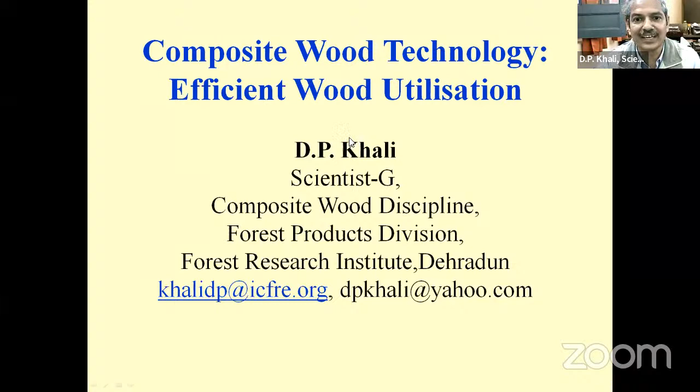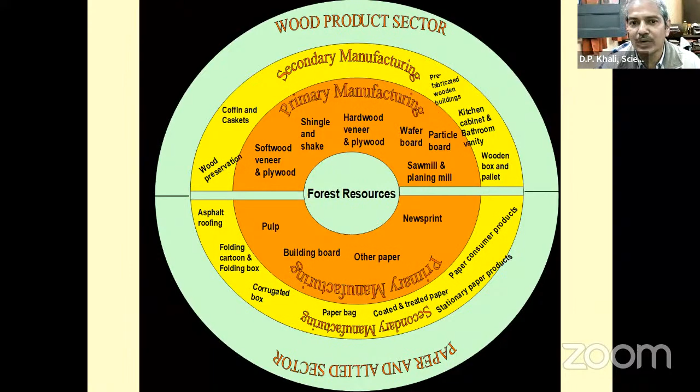I will be discussing with you all today on the topic that is composite wood technology, efficient wood utilization. So directly coming to the topic, basically the wood product sector can be broadly categorized into 2 categories. One we call the primary manufacturing sector, another we call the secondary manufacturing sector.

This slide is a very popular slide. You all must have seen it earlier also. So basically, you all know wood is a wonderful material. The advantages of wood, the merits of wood, you all know. But here I will be talking about the three major disadvantages of wood as far as utilization is concerned.

The number one disadvantage as far as utilization is concerned: wood has got a lot of variability. In other terms, we call wood an anisotropic material. An anisotropic material means its property changes with direction. You must have seen that its property from pith to periphery, even from bottom to top, varies. So this nature we call the anisotropic nature. As far as utilization is concerned, this is one disadvantage.

Another disadvantage: wood is not a dimensionally stable material. What does it mean? When wood comes in contact with moisture, it swells, and if you remove the moisture, it shrinks. So it changes its dimension when it comes in contact with moisture. So that is the second disadvantage.

The third disadvantage is that when we are using wood in solid form, a lot of wastage is there. That is the utilization yield. If we use wood in solid form or in the form of timber, the maximum utilization yield is up to 35 to 40%. The remainder is wasted or used for some other inferior purpose.

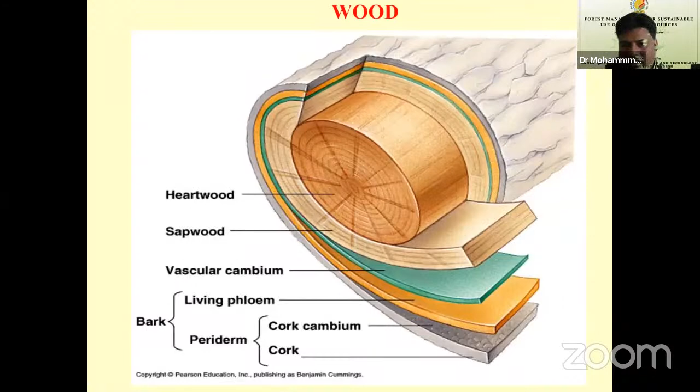Sir, I would interrupt you. Just a minute, sir. I think your slide is not moving. Okay. Yeah, it is moving now. Yes, I had not moved it.

Okay. So for addressing those three major disadvantages, we can use lignocellulosic material in the form of composite. Now, somebody asked, what is the technical definition of composite? When two or more dissimilar materials are mixed together and a new material forms, that material we call a composite. So a wood composite is made by mixing lignocellulosic material with resin and some additives for modifying certain properties of the end product. When these three things are mixed together, that process we call resination, and they are reconstituted in the form of a product. That product is known as a wood composite.

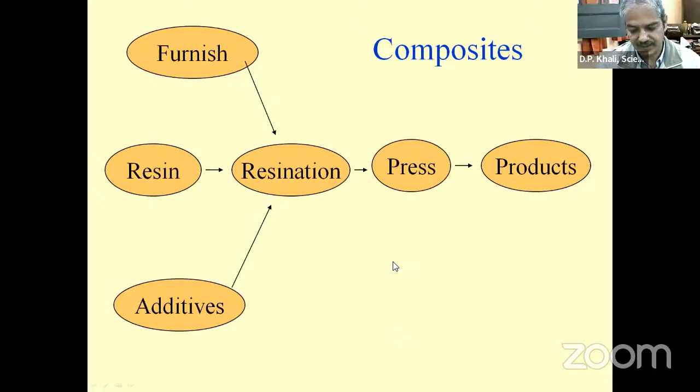Okay, so if we see the history, the usage of wood composites goes back to early mankind. But composites can be categorized into three major types. The first one is where we make composites using veneer. Veneers are nothing but very thin sheets of wood. If the constituent material is in the form of veneer or lamella and you make composites out of that, that is the first type of composite.

In the second type of composite, the constituent material is in the form of particles; an example is particle board. In the third, the constituent material is in the form of fiber, and if we make composites out of those fibers, that is the third category. So these are the major categories of composites: plywood, particle board, and fiber board.

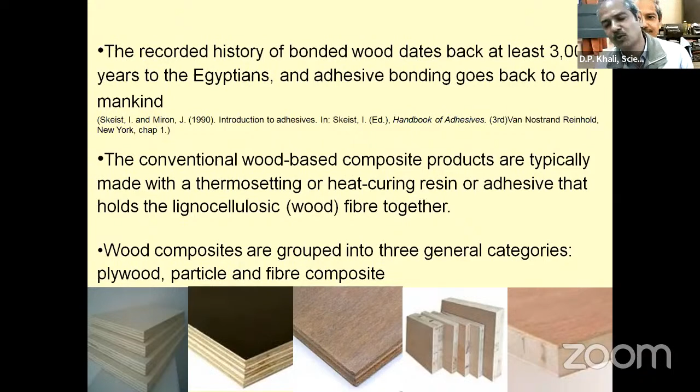If we see the market share of these composites, globally the market is still dominated by particle board. As far as our country, India, is concerned, the market is still dominated by plywood. 75 to 80% of whatever composites are used is plywood. Particle board has only a 10 to 15% market share, and MDF only 5 to 10%. What is the reason? In the coming slides, I will be discussing it with you.

Still, in our country, the major wood consumer in India is the plywood industry. As you all know, before the green felling ban started, the plywood industry was mostly dependent on forest trees only. So whatever commercially available trees were available could be utilized for manufacturing of the plywood.

Earlier, mainly Acacia species, Abies pindrow, Albizia lebbeck and even Dipterocarpus species were used, because Dipterocarpus species were available in plenty at that time. Those were converted to veneer, and the veneer was used for manufacturing of the plywood. But after the ban on green felling, no wood species are available from the forest, so the plywood industry is only dependent on plantation wood species.

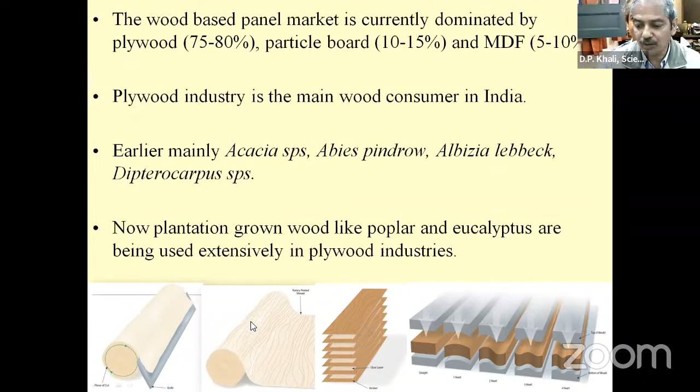As far as northern India is concerned, the plantation species mostly available are poplar and eucalyptus. So nowadays the plywood industry is using poplar and eucalyptus for manufacturing of the plywood. And in southern India, rubber wood is also available, so rubber wood is also being used for manufacturing of the plywood.

But not only these three species; whatever other wood material is available can also be utilized for manufacturing of the plywood. But mostly these three species are available and used by the plywood industry.

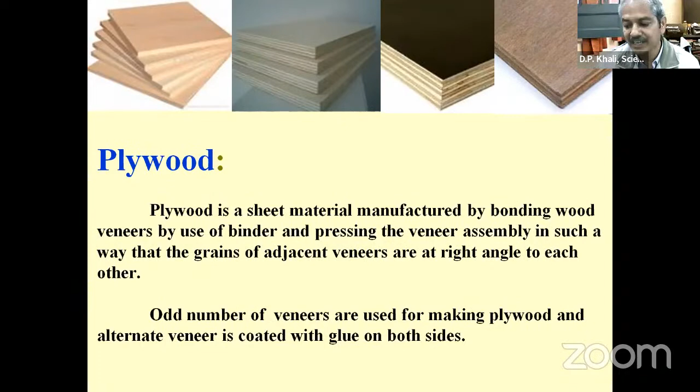Now, as far as the definition of plywood is concerned, there are three important points. Number one, plywood is made of veneer. Veneers are nothing but very thin sheets of wood material. Second, two adjacent veneers are always perpendicular to each other. And third, for balanced construction, an odd number of veneers is always used for manufacturing of the plywood.

Okay, now types of plywood. For aesthetic purpose, if on the top and bottom we use some decorative veneer, we call it decorative plywood, and the second type is commercial plywood. About 75 to 80% of production in our country is general purpose plywood. In the bracket, I have written the IS specification. General purpose plywood IS specification is 303, and all these specifications are freely available on the net. Anybody interested to know more about individual plywood can download them through the internet.

General purpose plywood can be categorized into two categories depending on where it is used. If it is used for interior purpose, it is interior grade plywood, and if it is used for exterior purpose, we call it exterior grade plywood. Interior or exterior grade depends on what kind of adhesive we are using. That also I will be discussing in brief later on.

Then another type, shuttering purpose plywood, is manufactured for certain purposes. Structural plywood, although the IS specification is there, no industry in our country is manufacturing it because there is no demand at all right now. But still, it is for academic interest and the IS specification is there.

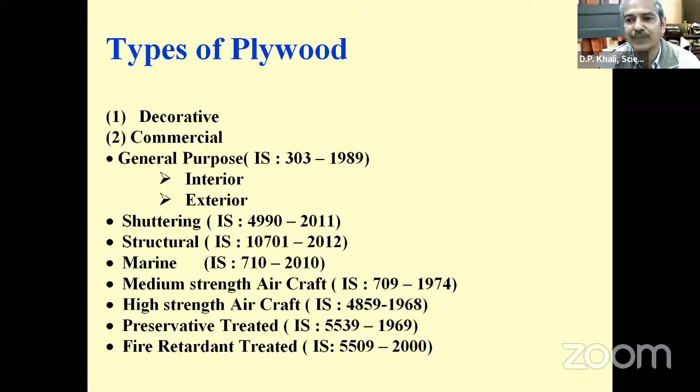Marine grade plywood can be utilized for extreme conditions, like dockyard usage or marine conditions. The next two are again for academic purpose only: preservative treated plywood and fire retardant treated plywood. These are also available and are being manufactured in our country.

Now, why is the market share of plywood still dominant? There are plenty of reasons. The first reason is plywood is a highly stable panel, and the earliest composite developed in our country is plywood, so most users are familiar with it. There is a lot of awareness of the usage of plywood, so that's why this market is still dominated by plywood.

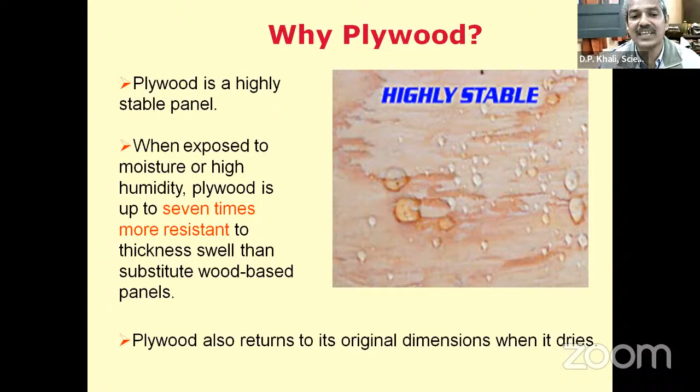The second important aspect is dimensional stability. Particle board and fiber board, if not used properly, are not dimensionally stable because moisture penetrates through their edges, and then they swell. Plywood is approximately 7 times more resistant to thickness swell than the substitute wood-based panels. And if plywood has absorbed some moisture, once it dries up, it regains its original shape and size.

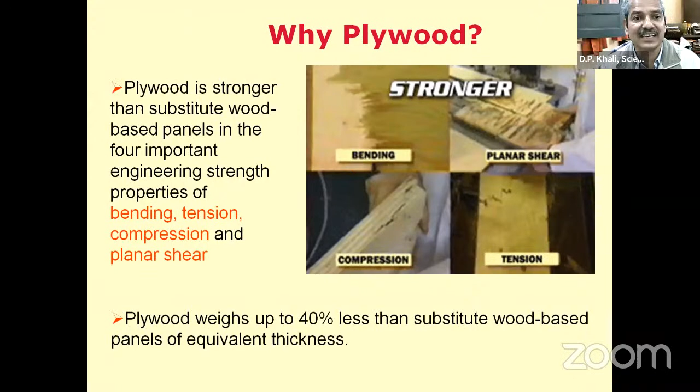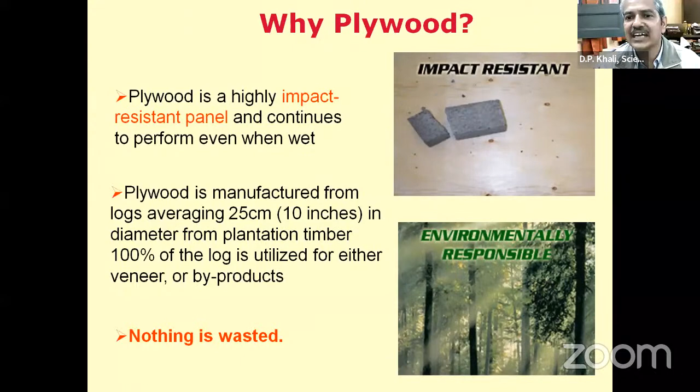Second important aspect, that is the strength aspect. So all four strength aspects, that is bending strength, tension strength, compression strength, and planar shear, it is stronger than other substitute wood-based panels. So this is another important aspect. The third important aspect, highly impact resistant. Plywood is highly impact resistant. So due to these reasons, still the market is dominated by plywood, the usage of plywood.

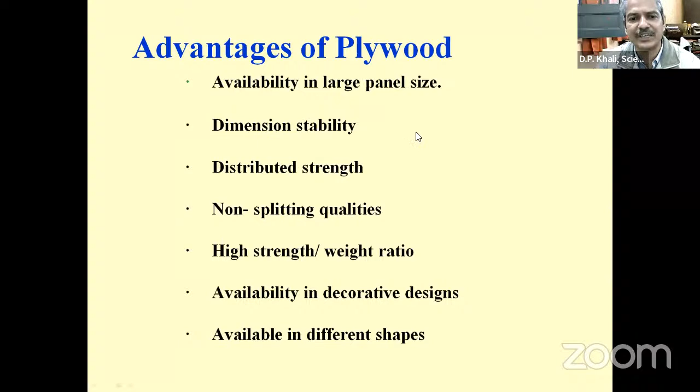These are some of the advantages you all must be knowing, because plywood, whatever size you require, in the market it is available in various sizes, starting from 3 feet by 6 feet, even up to 12 by 24 feet size plywood are available. Even if demands are there, bigger than the size of 12 by 24 can be manufactured. Dimensionally stable, distributed strength, non-splitting quality, high strength to weight ratio. So in different shapes and sizes you can manufacture plywood.

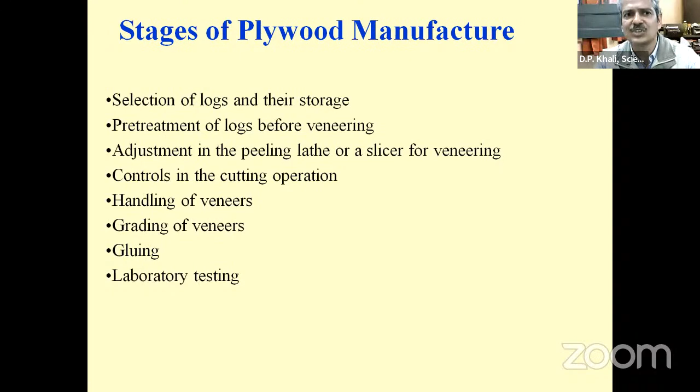These are the stages of plywood. In brief, I will be discussing with you the stages of plywood. The first one is the important one, selection of logs and their storage. This is when the plywood industry was dependent on the forest wood. At that time, plenty of raw material was available, so we had the choice of selection of the material. But nowadays, we don't have any choice. Whatever plantation timber is available has to be converted to veneer and to plywood.

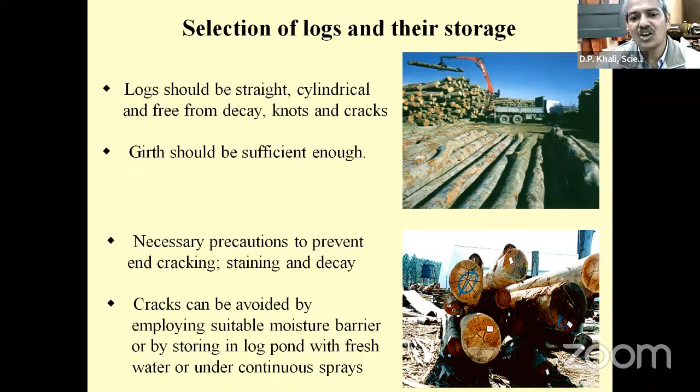And after felling of the log, one has to try to avoid moisture loss. If more moisture loss is there, then again we have to reintroduce the moisture inside the log. That's why during storage, it has to be stored in the log pond. If at all it has dried, then steaming is required. The log has to be steamed. Now, how long it has to be steamed, the duration, all these depend on what kind of wood is there, how much specific gravity it has got.

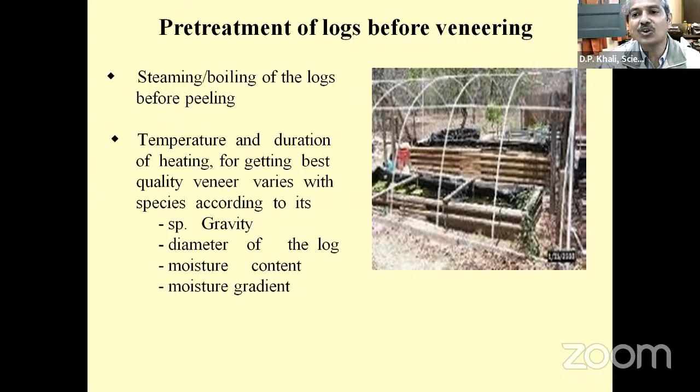If it's a very hardwood species, then a longer duration of steaming is required. If a larger diameter is there, again, it depends on that also. How much moisture content it has already got, and the moisture gradient. So the temperature and duration of heating depend on these four aspects. Okay.

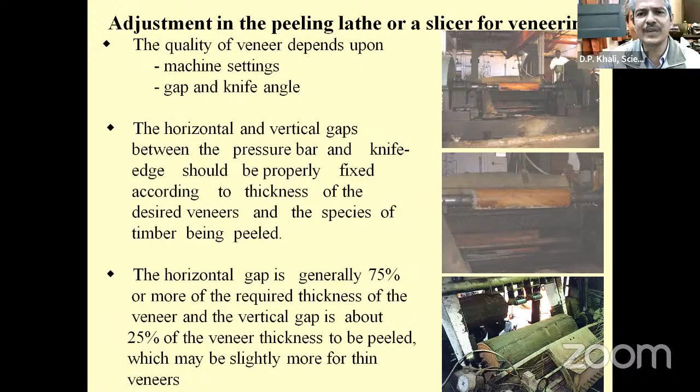Now, the quality of veneer depends on the setting of the machine, the gap and knife angle, depending on different wood species. For hardwood species, a different knife angle and gap setting is required. Then, depending on the thickness, how thick a veneer we require. So all settings have to be done here at the time of peeling. This type of peeling we call rotary peeling. With the help of this rotary peeling, we are getting the veneer.

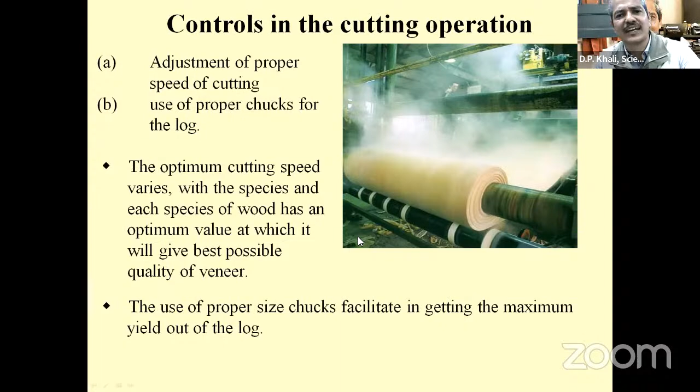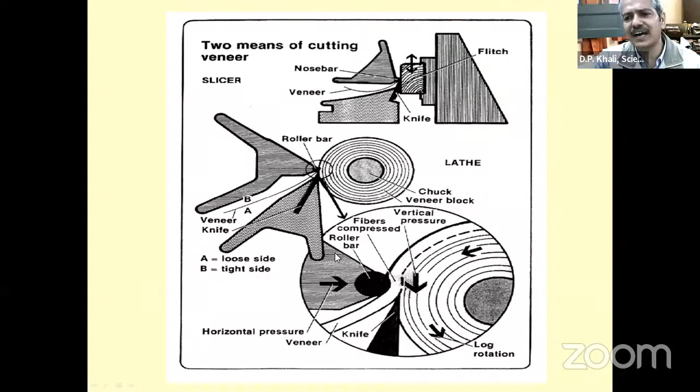So here, if we are trying to manufacture the decorative veneer, the log first has to be converted to the flitch, in the form of a flitch only. Then only we can get this decorative veneer. But in the rotary peeling lathe, the log first has to be debarked and directly it can be put in the peeling lathe and the veneer can be generated.

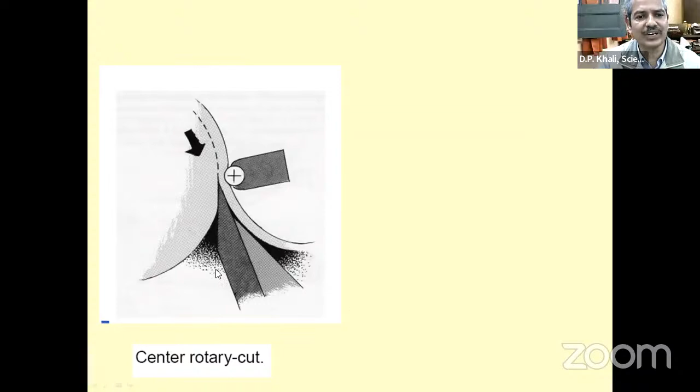This is another schematic view. You can see center rotary cut this way. The knife is coming in contact with the log and a continuous piece of veneer is coming out. And so these are the schematic diagrams I am showing you.

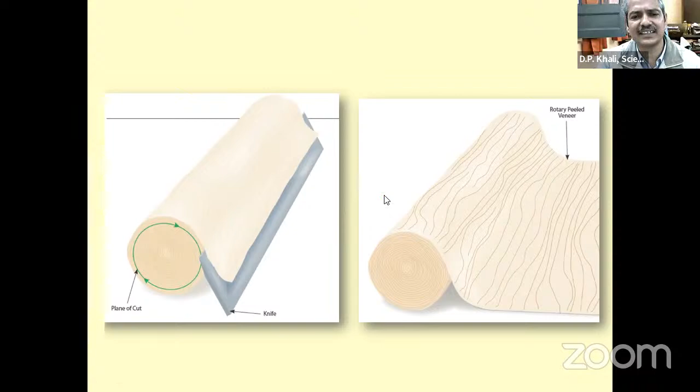Now, once veneer has been generated, there are two ways. If we have got a very good cylindrical log, then a continuous piece of veneer will come out. But ultimately we have to make the 6 feet ply. So we have to cut the veneer to that size. Converting a bigger size of veneer into a smaller size of veneer, that process we call the veneer clipping process.

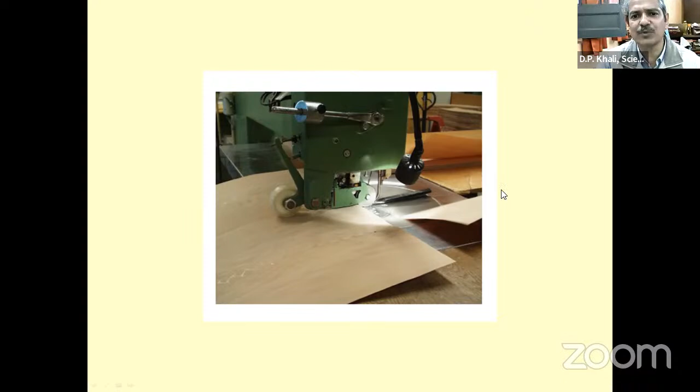Now, once veneer has been generated, then handling of veneer. Because earlier Dipterocarpus veneers were being used, Dipterocarpus species can be used as top and bottom veneer and also as core veneer. So immediately after peeling, those veneers can be categorized, whether some veneer can be used for the face, or the defective one can be used for the core.

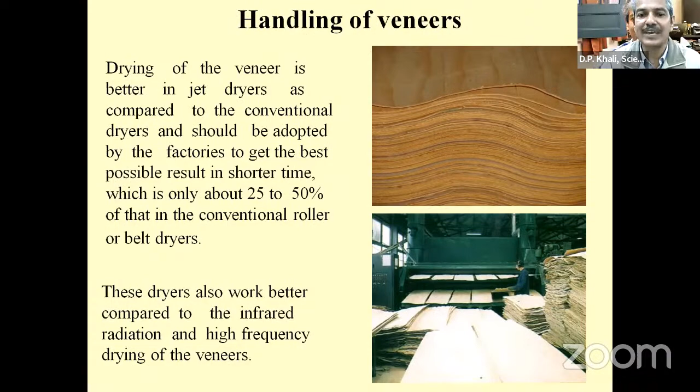But if you are using poplar and eucalyptus, then this classifying or grading is not required, because poplar and eucalyptus are being used for the core purpose only, not for the face and back. For face and back, still in our country, the Dipterocarpus species is being used. Nowadays some gurjan and other species veneers are being imported from abroad for face and back veneer. Nowadays we are working here at FRI on melia. We are trying to convert melia for face veneer and back veneer.

So once grading has been done, then applying the adhesive on the surface of the veneer, because ultimately those veneers have to be bonded together. So how to apply the adhesive on the surface of veneer? There are various ways, but in our country, the major method is application of the glue with the help of a glue spreader.

Again, you can see in the photograph, this is nothing but a sugar cane crushing kind of machine. At the bottom, the tank of the adhesive used to be here, because these two rollers are rotating anti-clockwise. So the bottom roller will dip in the adhesive and take the adhesive onto its surface, and in that process, on the upper roller also adhesive will get applied, and then the veneer can be passed through these two.

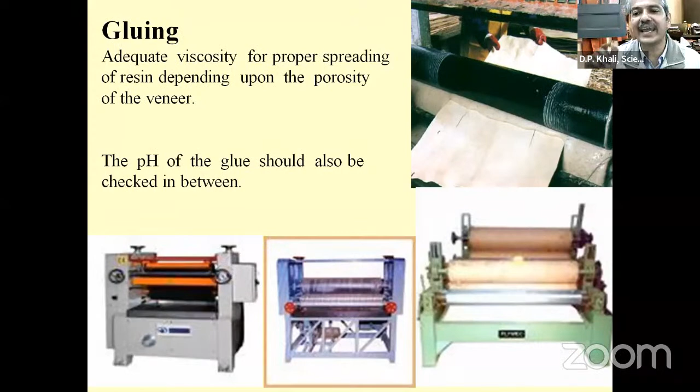Once veneer has been passed through these two rollers, the adhesive will get applied on the whole surface of the veneer. That is the easiest and cheapest way of applying the adhesive. Other ways like spraying, brushing, are also there. But at this step, the pH control becomes very important. That's why quality assurance in the industry matters here. Anybody can make composites, anybody can make plywood, but quality plywood can be made by a trained person only. So knowledge of all these parameters is required.

Assembly means we have to arrange the veneer in such a way that two adjacent veneers are always perpendicular to each other. The veneer which has adhesive on both surfaces, we call the even number veneer. Suppose we call the top number 1 veneer, that veneer will not have any adhesive at all. The second number veneer will have adhesive on both surfaces. The third veneer will not have any adhesive at all. So top and third will have the same direction, while the second number veneer will have the perpendicular direction. That's why always top and bottom - if we have 7 veneers, both surfaces will have the same direction. That's why it's called the balanced construction. This type of construction we call balanced construction.

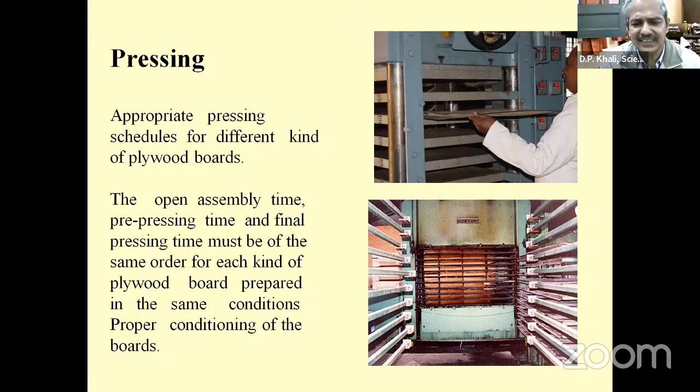So always for manufacturing of plywood, odd number of veneers are used. These are some technical terms, so I will not go into detail.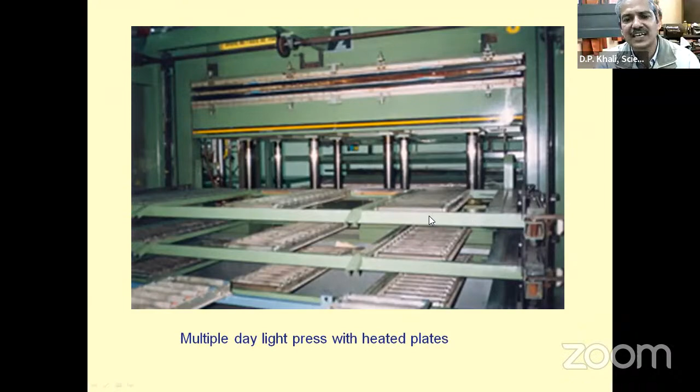This is a multiple daylight press, multi opening press, continuous press, industrial press. Industry uses this one. It's semi-automatic - here conveyor belts are there. Using conveyor belt loading, automatic loading and automatic unloading can be done.

Once plywood, because we are a research organization - or any composite for that matter - has been prepared, for quality assurance random sample selection is required. So sample has to be selected and those have to be tested. So laboratory testing is actually here.

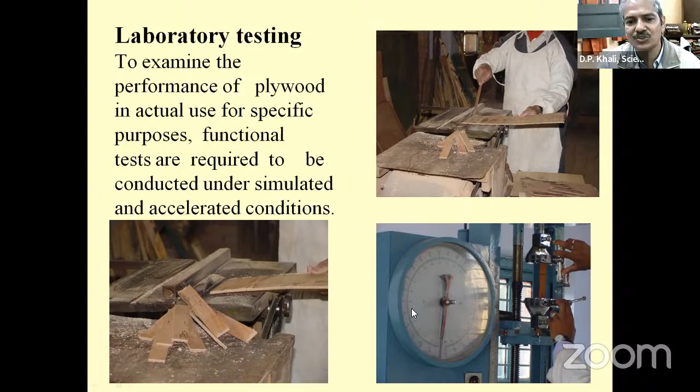This is a tensile testing machine. You can see here a very primitive type. We have computerized ones also, but for teaching purposes, because here we can show how much load is being applied, at what load, how much deflection is there. So all these things can be seen. For teaching purposes, this one is the best one.

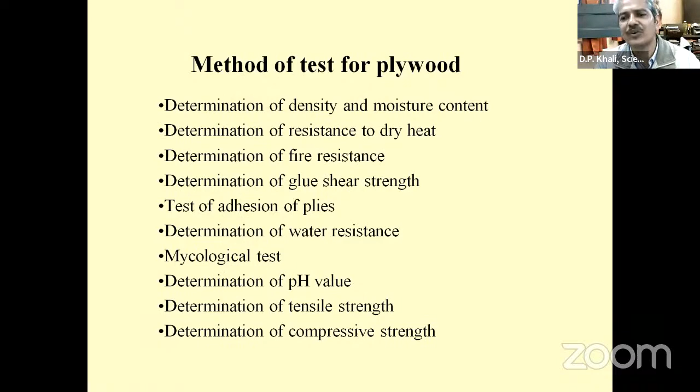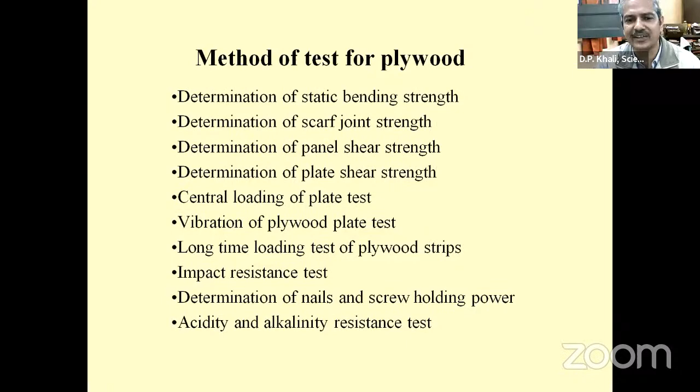Now what kind of test has to be performed? It depends on where our product is going to be used. Depending on end use, that particular test has to be performed. For insulation purposes, the plywood is being manufactured, so related to insulation. If it is being used for semi-structural purpose, then strength as well as durability. For furniture manufacturing, if it is being used, then screw holding, nail holding, all those kinds of tests. So depending on end usage, the test has to be performed.

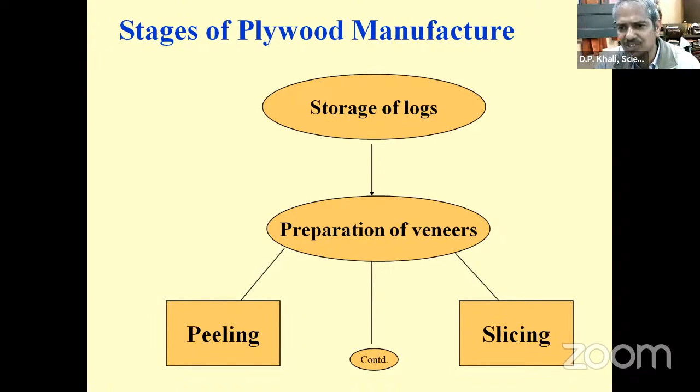Now this is the stages of plywood manufacture, in a flow chart: storage of log, preparation of veneer - two ways of preparation, peeling and slicing - then clipping or splicing. If bigger veneers are there, converting into smaller pieces is clipping; from smaller to bigger is splicing.

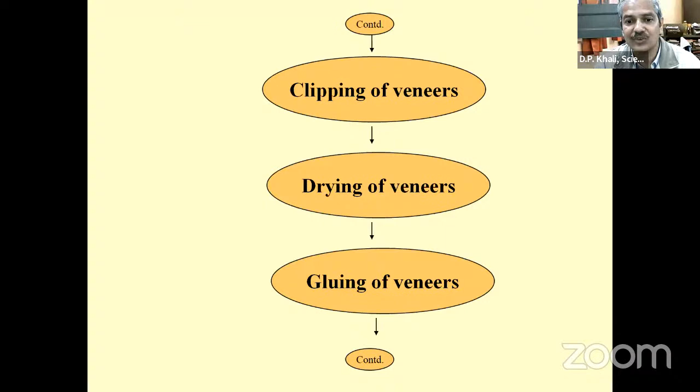The drying of veneers becomes very important because adhesive bonding can achieve the ideal good strength if moisture content is below 12%. Then gluing of veneer, assembly of glue veneer, pressing of assembly - now cold pressing and hot pressing. It depends on what kind of adhesive we are using. Now here cold pressing does not mean freezing temperature, it means room temperature pressing. So even if we are using urea formaldehyde adhesive, curing can take place at room temperature.

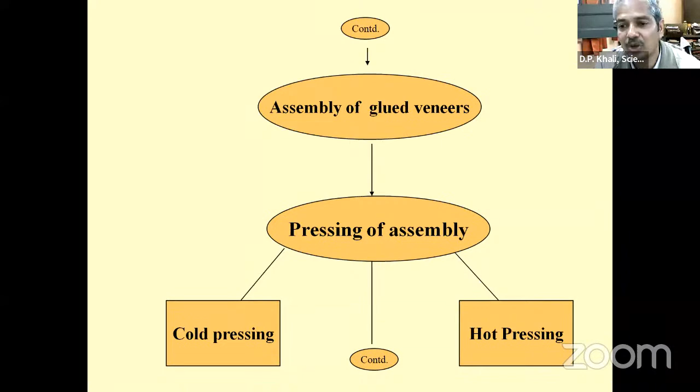Here curing means tacking of the adhesive - curing means bond formation. If we are establishing the bond, that process we call curing. So even if we are using urea formaldehyde adhesive, cold pressing can be done, but in the industry mostly hot pressing is the preferred one. Then conditioning, finishing, packaging, and marketing. So this is the manufacturing process of the plywood.

Same way we can manufacture other composite boards, only the preparation of raw material differs. In plywood, the log is converted into veneer, then veneers are used for manufacturing plywood. If we have to make particle board, first the lignocellulosic material has to be converted into particles, then the adhesive has to be applied on the surface of the particles, then those have to be reconstituted, using the same kind of press in the form of particles.

Similarly, in the case of fiber board, the lignocellulosic material has to be converted to fiber using various pulping processes. But for manufacturing medium density fiber board and hard board, we use the thermomechanical pulping process. There are other processes like chemical pulping here.

Lignocellulosic material can be converted into fiber using the chemical process, which is adopted in the paper industry. But as far as the fiber board industry is concerned, the preferred pulping process is thermomechanical pulping.

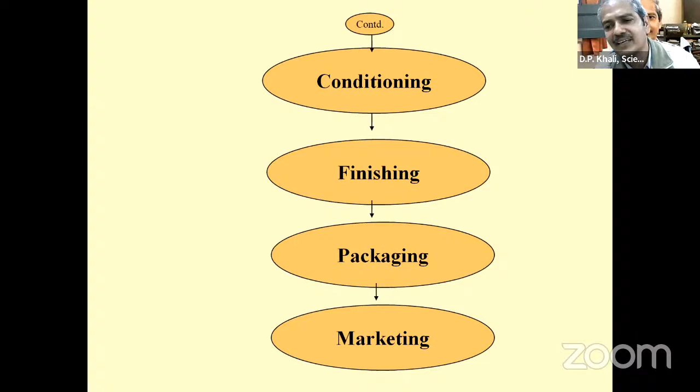Once the raw material is ready, adding the adhesive can be substituted in the final product. Now what is the adhesive? Again, for quality assurance and whatever desired quality we want, the quality depends on what kind of adhesive we use. Adhesive is nothing but the material which binds together the lignocellulosic material.

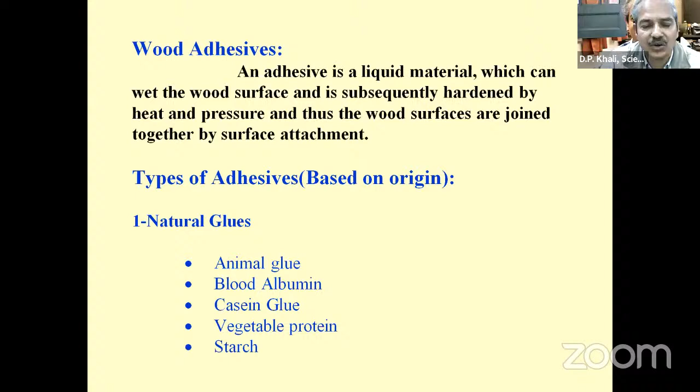It can be categorized into two categories depending on origin: natural glue and synthetic glue. Nowadays, nobody uses natural glue. Mostly synthetic resins are used as far as our country is concerned. But with synthetic glue, a lot of environmental concerns are there, so a lot of R&D is being carried out.

To see whether we can switch over from synthetic glue to other glue systems, Dr. Nasir has done some work on binderless systems also. Similarly, from nature, lignin-based glues and tannin-based glues are also available, and those can be utilized.

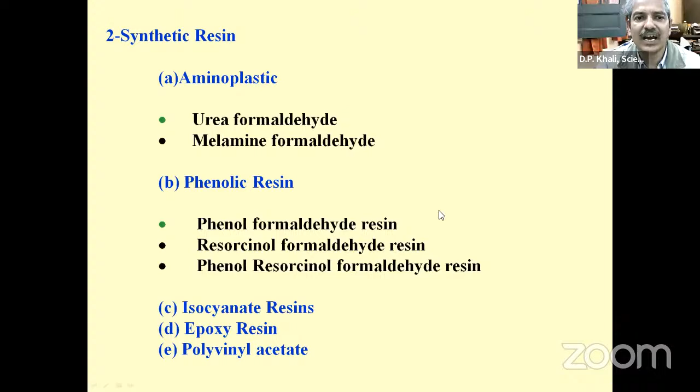But still, as far as our country is concerned, for interior purposes amino-based adhesives are being used, and for exterior purposes phenolic-based adhesives are used. Exterior-grade plywood is manufactured using phenolic formaldehyde adhesive, and interior-grade plywood uses aminoplastic, that is urea formaldehyde adhesive.

Grades of adhesive include interior grade and exterior grade. Now this last one is very important: boiling water proof, boiling water resistant, and moisture resistant. The adhesive can be categorized into three categories: BWP, BWR, and MR.

MR is the inferior one, used for interior purposes. With MR grade adhesive, plywood manufactured cannot be used for exterior grade at all, only interior grade. It can survive in dry conditions, but if moisture comes in contact, it may get disintegrated.

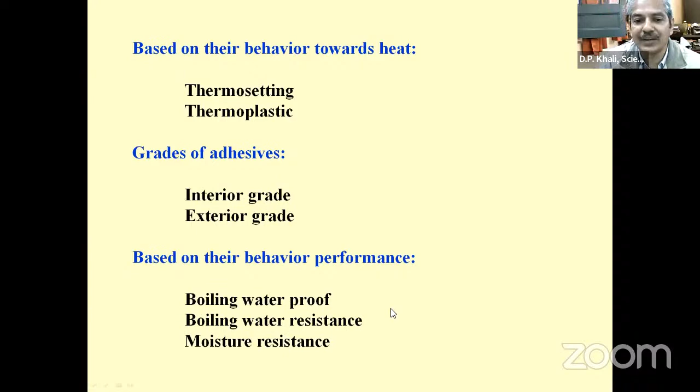Boiling water resistant adhesive can be used for exterior purposes. BWP, boiling water proof, can be used for extreme conditions like shuttering purpose plywood. This BWP adhesive is also used for marine grade plywood.

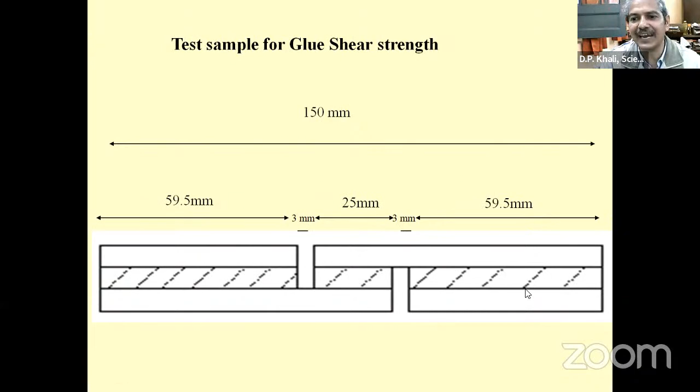Now, what does average and individual mean? Since wood is a biological material, to cater for variability, at least 6 samples are tested. The average of 6 samples should be more than 135. Out of those 6 samples, none should have less than 110 kg. So how much load should 1 square inch area be able to withstand? Only 1 square inch area should be able to withstand more than 135 kg.

And in the case of BWP, similarly in the case of BWR, and in the case of MR, because it is used for interior purposes, the average should be 100 kg, with individual samples at 80 kg.

Now, this is for the test of strength, how much strength it has got. Now, how to test durability? For durability, two tests have been simulated in the lab as accelerated tests. The first one is the wet test. What does the wet test mean?

For BWP, those kinds of samples, as shown in the next slide, are kept in boiling water for 72 hours. After boiling those samples for 72 hours, they are again subjected to the glue shear strength test. If they are able to withstand more than 100 kg, then we say it meets the BWP criteria.

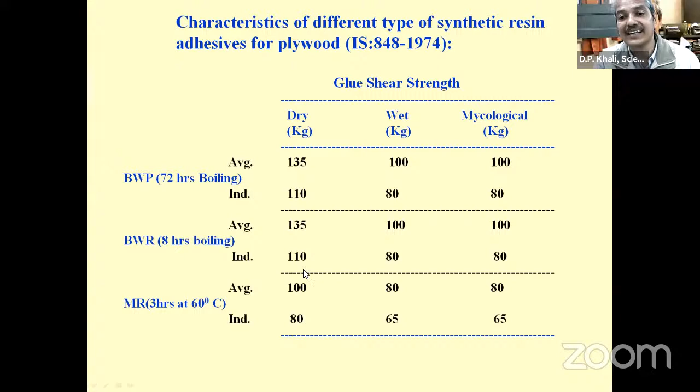So you can see that if any plywood is ISI marked, then it should have very good quality, even moisture resistant also. Moisture resistant also, it should withstand 3 hours warm water dipping test. Then only that ply can have the ISI. So for academic as well as for quality assurance, this is essential, which I have shown you.

Now this, we call the diagnostic slide. I can show you where the failure occurred, what kind of failure has happened, what went wrong during manufacturing. So for industry purpose and for quality assurance, it becomes very important.

The topmost, you can see, the green one is the adhesive layer, the yellow one is the veneer wood. If wood failure is taking place, this is a structural failure. This is due to process parameters. Somewhere we have done wrong with our process parameters, whether we have applied less pressure, or temperature is not sufficient, something related with process parameters.

So the second one here is non-compatibility. Wood-to-adhesive failure is here, that is, compatibility is not there; adhesive is not compatible with wood. The third failure, if we are able to see it, means wood failure has taken place. So either we have applied more amount of adhesive, or in the adhesive itself there's some problem.

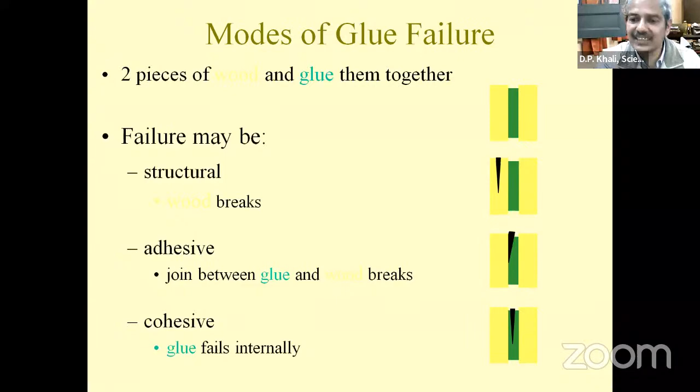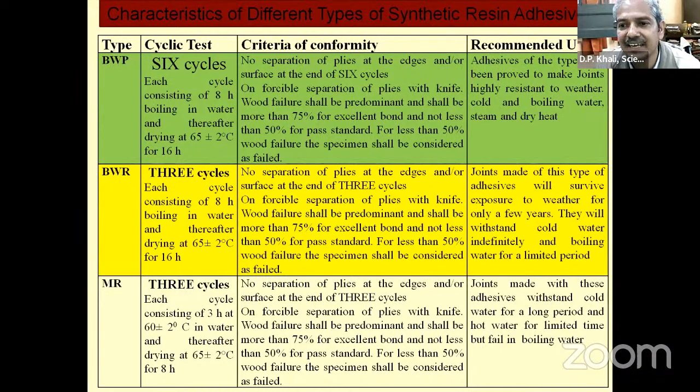And that's why we call it diagnostic. Now earlier I gave the testing method for lab purposes, but in industry they cannot have the UTM, universal testing machine, for their quality assurance. So this is for testing the quality assurance as far as industry is concerned, so they can do it easily in their industry.

Having a small kind of knife, the photograph I will be showing, what kind of knife we can use. So they can boil using any water bath or even a cooker also. They can boil it 6 cycles for BWP, cycles consisting of 8 hours boiling in water and thereafter drying at 65 degrees for 16 hours. Such type of 6 cycles they have to perform, and then see whether veneers are getting disintegrated or not.

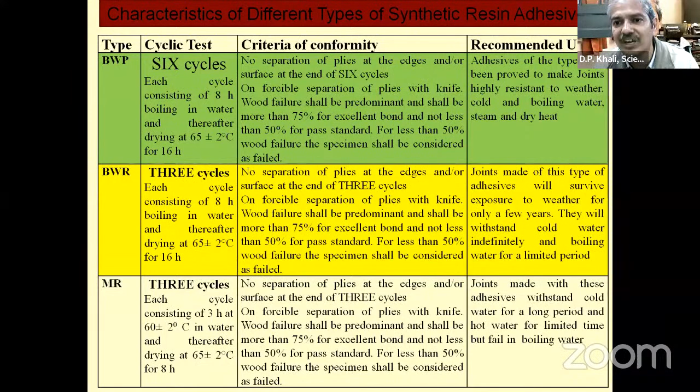And then forcefully inserting the knife in between 2 veneers, if they are not disintegrating, this criteria meets the BWP. Similarly, for BWR, 3 cycles has to be performed, and for MR, 3 cycles, but the conditions of the cycle are different. We are only dipping 3 hours in warm water and then drying for 8 hours. And if it meets the criteria, then we say that the proper adhesive is being used.

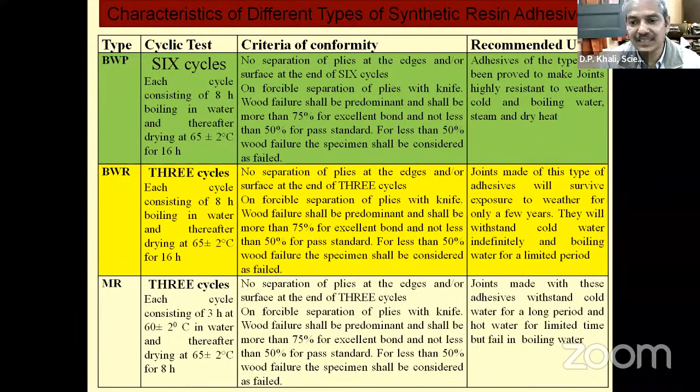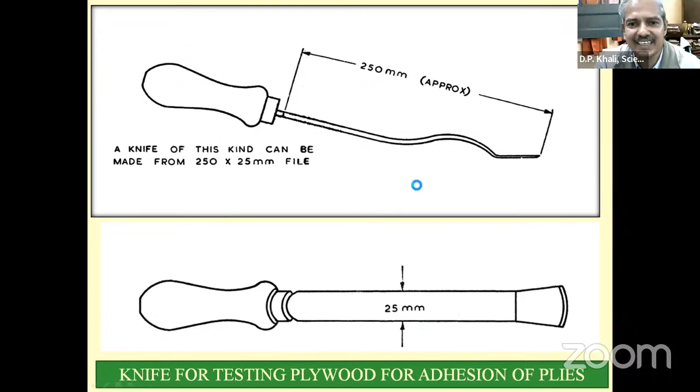So this is for the industrial purpose; all these details I have given. Now, what kind of knife? Hopefully, either one of the details that has been given in the IS specification, either kind of knife can be used for separating 2 adjacent veneers. Now, for general purpose, that much is required.

Adhesive becomes very important, but if you are making marine grade and concrete shuttering grade plywood, then treatment also becomes very important. Because ultimately here wood is also being used, and that plywood is going to be used in marine conditions where it is in contact with a number of borers and microorganisms also, so that wood part can be eaten away. That's why the treatment is essential.

And pressure impregnation treatment is essential because this much retention can be achieved only with the help of the pressure treatment method. And all these preservatives you must be aware about, CCA, CCB, are still being used in our country. Although CCA is banned abroad, in our country it is still being used.

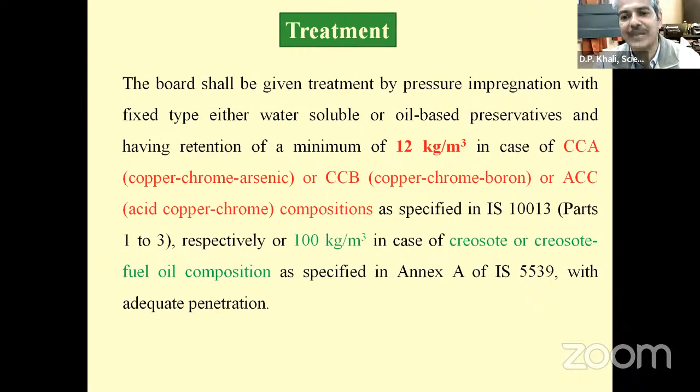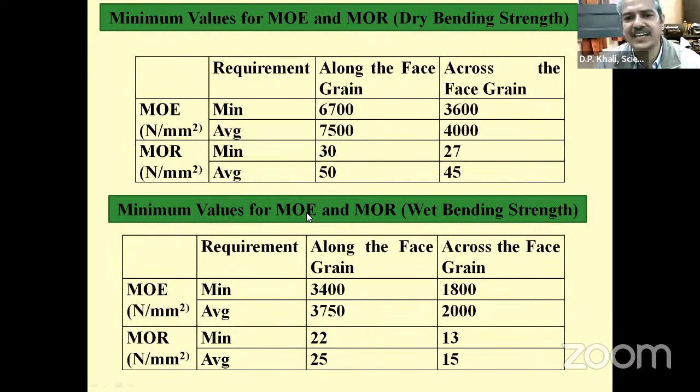What should be the criteria? Again, I am not going to discuss it because all these are here in the IS specification. How much threshold limit should be there, it is given there. Then another type is the block board. Plywood is made of all veneer. So if we require up to 18 mm thickness, we can use the all-veneer build-up.

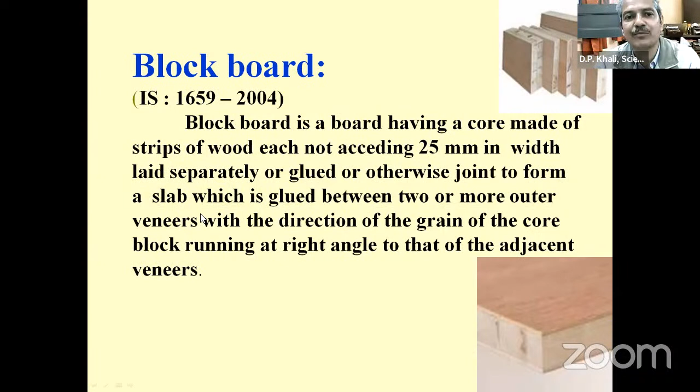But if we require a 25 mm panel and we increase the number of veneers, what will happen? The material will become heavier and expensive also. So that's why, if we are using the wooden sheet in between, and at the top and bottom we are using the veneer, such type of composite we call the block board.

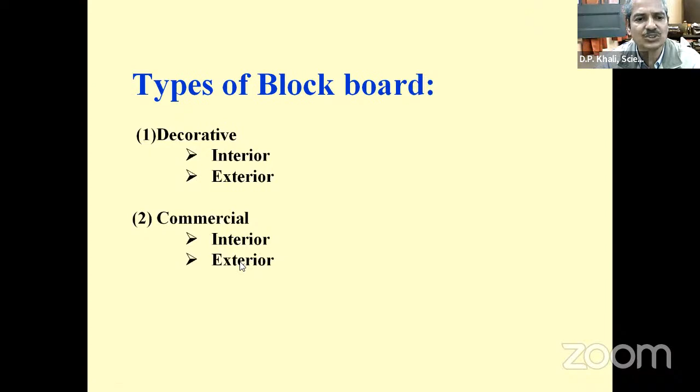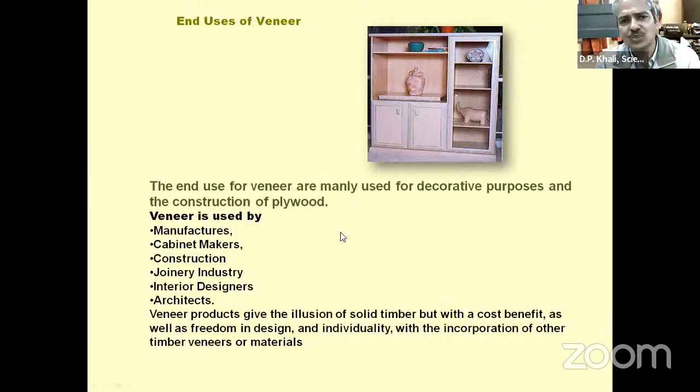Non-structural and semi-structural purpose. These composites cannot be used for the structural purpose. For the structural purpose, other types of composites like LVL, laminated veneer lumber, can be used. Then glulam is there, CLT is there. So those types of new modern composites are being used for the structural purpose.

Now coming to the technology which we have developed here in the institute.

I think how much time I have? Another 10 minutes. I will try to summarize all these technologies in 10 minutes.

So this is one technology which we have developed here in FRI, CombiPly. Now what does CombiPly mean? Earlier, plywood was being manufactured using a single species, either Dipterocarpus species or poplar species. But what happens if we are using only poplar wood? As you all know, poplar has got very low density.

So we are not able to achieve the desired strength. The desired MOE, MOR cannot be achieved. So the quality of plywood using only poplar is very inferior. But poplar has got one very good quality, that it has very high glueability. It can glue together any material very tightly. But eucalyptus is very poor as far as glueability is concerned.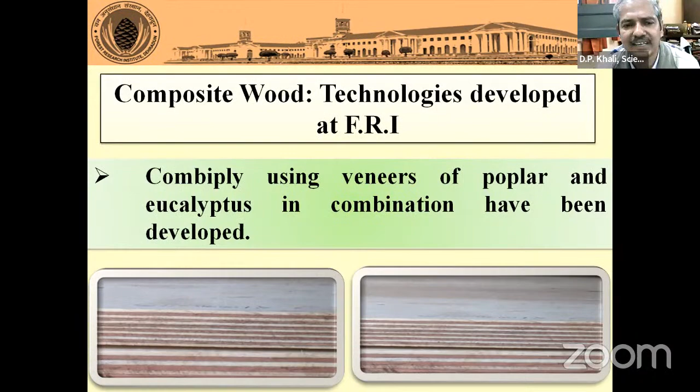So they are now only manufacturing this type of plywood, CombiPly. In the industry, they call it alternate ply. So alternate ply and CombiPly are the same. Now, as we are discussing, the plywood industry is only dependent nowadays on poplar and eucalyptus.

So here in our institute, recently we have developed 10 different varieties of Melia dubia also, and they are released. So now an alternative good species is also available. Our institute is promoting Melia dubia plantation throughout the country, and we have worked on that, and very good quality plywood can be made out of Melia dubia. We are working on this species for face veneer.

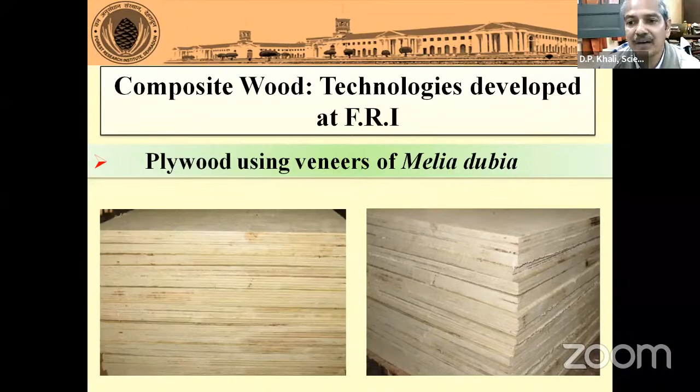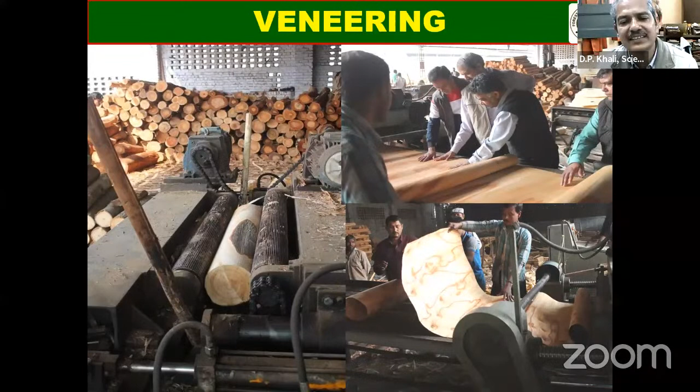So this is the trial we have done, on Melia. You can see here, this is the peeling, the spindle-less peeling lathe, here in one of the industries in Yamunanagar. This is the spindle-less peeling lathe. We are assessing the quality of the veneer, all these quality measures.

This is our pilot plant only. You must be knowing that the first plywood pilot plant in our country was established at FRI. So from here only, the plywood industry then got established in the northeastern states.

So then the third technology is the combi LVL. Combi ply we cannot use for structural purposes. This is the combi LVL, combi laminated veneer lumber. This can be used for structural purposes. Structural purpose, I mean to say, where heavy load is going to be applied: for beams, for columns, for bridges. Those kinds of uses we call structural purposes.

So this also we developed here, again using poplar and eucalyptus. If you see the properties, poplar cannot be used for any such purpose, but if it is reconstituted in the form of combi LVL, it can be used for such high-end usage. So this is the combi LVL.

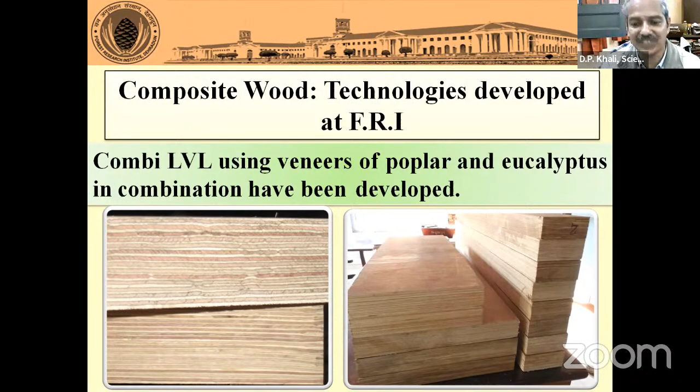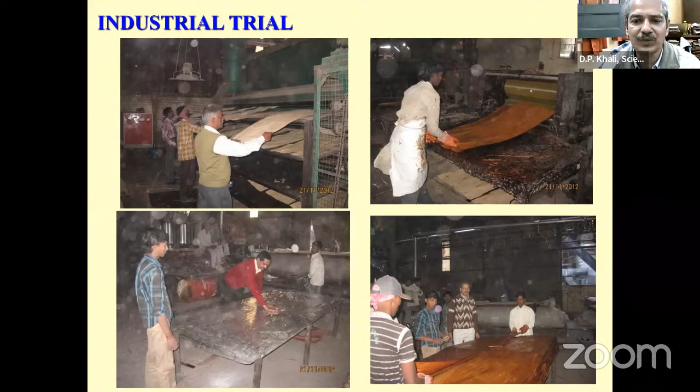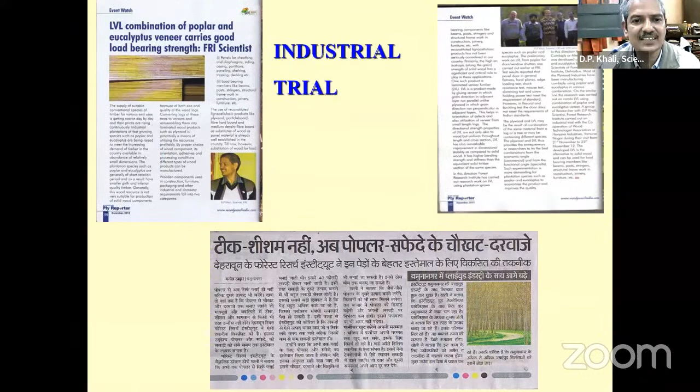This is our pilot scale trial, again in Yamunanagar. Here in the lab we did all the R&D, and then we went for the pilot scale trial. This is done in Yamunanagar. This is the pilot scale trial. When we introduced this, it was in the media also. And even these kinds of products we can make out of LVL, even a tabletop. You can see it has got a very good aesthetic look.

Now this is the fourth technology on which we are working now, radio frequency curing. Till now in our country, composites are being manufactured using the conventional method. In the conventional method, two plates are heated, and in between we put our assembly, and heat is transferred from those two plates to the core of the product. Because from top to core or bottom to core it takes a certain duration of time, due to the heat gradient, non-uniformity of product quality generally occurs.

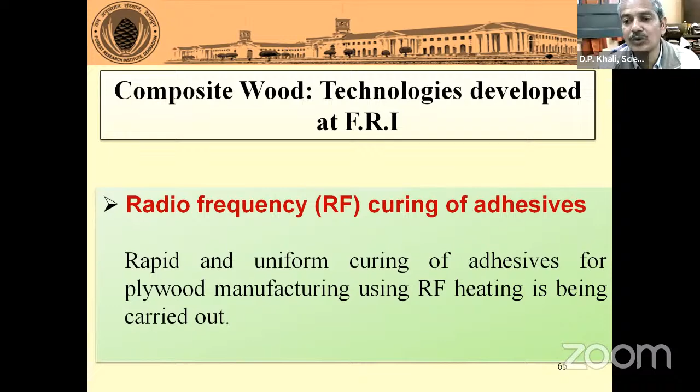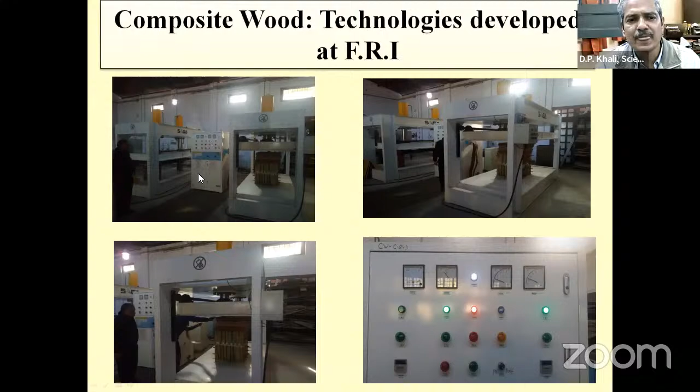So the press is more or less the same, a hydraulic press. Only we have removed all the plates in between. A single opening is there, and in between you can see the radio frequency sensor. With the help of this, all process parameters we have optimized. This is another technology we have right now as far as particle board and fiber boards are concerned.

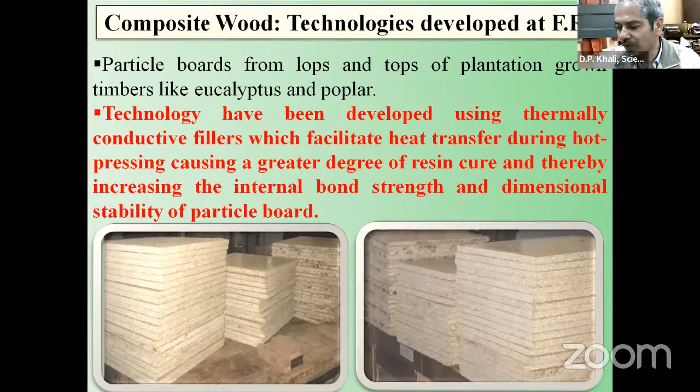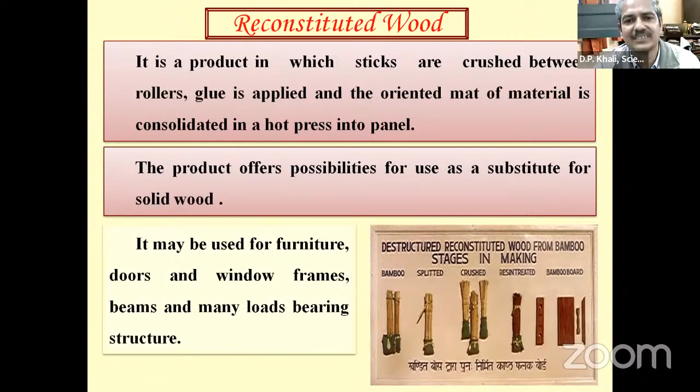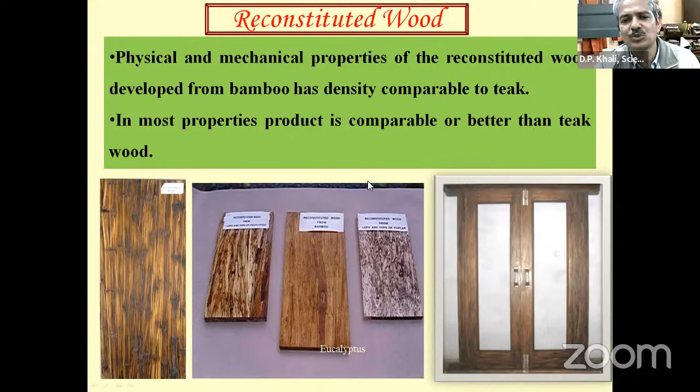Again, nanoparticles or even microparticles we have used for improving the quality of the composite, specifically the particle board. This is another technology, from bamboo, even from lantana. These destructured reconstituted woods we have developed. With the help of lops and tops, all these can be used for developing this kind of product, which can be used for structural purposes. Again, a very simple method of manufacturing.

Thanks a lot for your patient sharing. So we'll have, I think, another 5 minutes for discussion. If any questions are there, you are welcome. Over to you. Thank you. Nasir. Thank you very much, sir. It was really a great presentation, sir. You have covered, I would say, A to Z in composites, sir.

You have covered almost everything in plywood, from manufacturing to processing to the testing also. You have covered that part. And it was a really very extensive, elaborative presentation. So I hope that those who are not even dealing with forest products utilization must have also understood the process completely: how plywood is manufactured and how we do the testing and all that. And in the last, you compared the other composite wood products with the processing method of plywood. That was really a great presentation, sir.